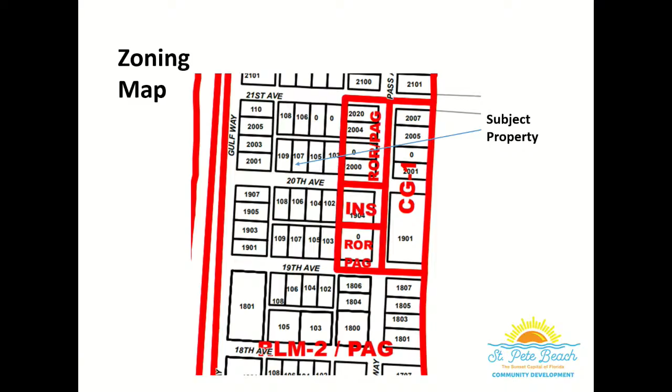An aerial of the property, it's on the north side of 20th Avenue. It has a zoning of RLM2, that's residential low medium on the future land use map. This property zoning district does allow for multifamily, but at the lot size, it allows for a single family home, which the applicant is requesting to build.

This property is within the Pass-a-Grille overlay. It does have standard 20-foot front and rear setbacks based on the underlying zoning district. The applicant did choose to go through the design review process, which makes them eligible for the house medium building type, which does have reduced setbacks. The trade-off is that it does go through the design review, which they went through earlier this month with the Historic Preservation Board.

The required rear setback for the house medium building type is 15 feet. They do have an existing setback that encroaches beyond that. They did receive a certificate of appropriateness for the prior historic home back in 2015 to add on to the rear of the structure, which made them eligible for a setback of up to 10 feet. They chose to build at 12.3 feet. That's not a variance, that is a benefit that comes along with historic structures when a certificate of appropriateness is issued, so they were able to take advantage of that at that time.

The home has been demolished. They are proposing a new home with a setback on the east side of 8 feet, which I'll show in a moment.

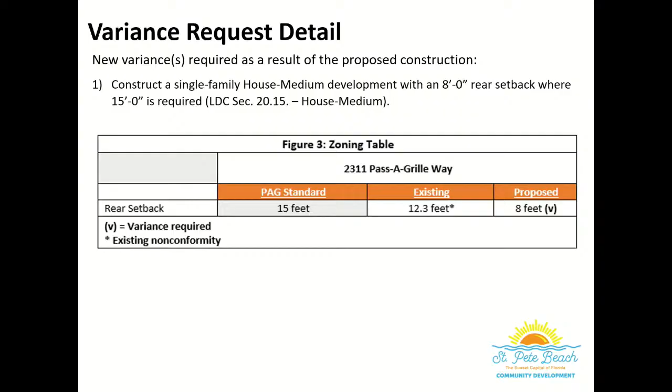The applicant had initially applied for a variance to the front setback requirement. They are choosing to build a structure with a 10-foot front setback that is a by-right permission based on the design review, which, as I mentioned before, they went through earlier this month.

They are requesting a rear setback reduction that goes beyond what the historic board can grant through that design review. As I mentioned before, that is a 15-foot rear setback. They are requesting a rear setback of 8 feet, so an encroachment of 7 feet. They had gone through that certificate of appropriateness process back in 2015, but that is a benefit that only extends to historic homes. It's not transferable for a new build. They do have to comply with the Land Development Code standard for the new build.

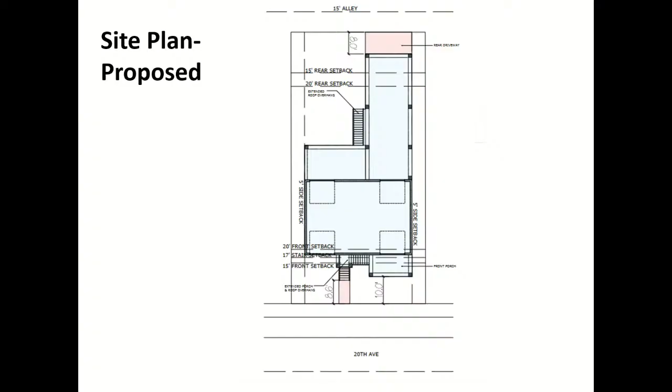The property was purchased in 2012. The setbacks at the time were stricter than they are currently. In 2017, the city amended its code to create these building types. So the rear setback has been reduced from an underlying zoning district standard of 20 feet to what is now allowed to be 15 feet based on the building type. As I mentioned before, the front setback standard has been reduced from 20 to 10 feet, which eliminated the need for a variance because the applicant chose to go through the design review. And I'll cover the second point in a moment.

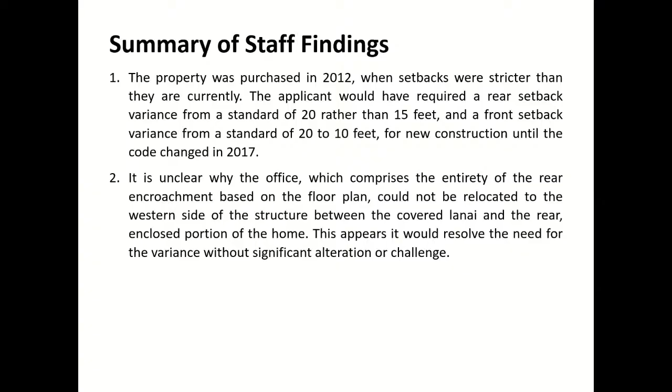Staff does find that the applicant has partially justified the request. The direct result of this variance is unlikely to cause any kind of adverse change in the neighborhood. I pointed out those 2 neighbor homes in the photographs. Those have 2-story portions of the residence that do encroach closer to the alleyway than the applicant is proposing to build the home. There are 2 stories. They are of similar scale and mass to the subject home. And actually, the subject home, I believe, is of a lesser living square footage than those homes would be. So the structure is certainly not out of character.

It did go through the design review process. There were a few minor design-related items that the Historic Board had recommended, particularly related to the garage doors in the front. The applicant has taken those under consideration, but both staff and the board had limited comments on the mass and scale of the structure. I do find it to be in character with the design standards as well as with the neighboring properties.

However, staff does request additional testimony from the applicant as to why the 7-foot portion of the building that is proposed to encroach could not be accommodated elsewhere without difficulty. Staff had pointed out next to the new outdoor deck on the west side of the structure, or possibly oriented north to south with the deck made a wraparound, would appear to eliminate the need for this variance.

Understanding that the applicant is seeking to comply with the same footprint, that is a benefit that comes along with contributing structures and preservation of historic structures. The applicant was not able to save the structure. I know that they looked into doing that, but that is a power that the Historic Preservation Board maintains as part of their certificate of appropriateness review powers, and we would just like to make sure that there is a genuine difficulty in this case with accommodating the office elsewhere on the site. The applicant should provide this testimony as well as whether any alternative plans have been developed should the variance not be granted.

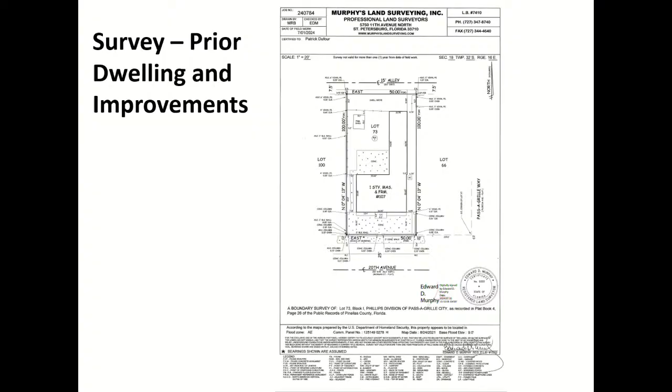Not the property we're discussing, but the neighboring property. Those pictures that Brandon referenced are also either contributing structures, and there is a single-family residence in front, and then they have the accessory structure to the back. So it's not one structure.

Okay, so I just wanted to clarify, there's a lot of setbacks talked about through this presentation. Number one, you said there is already an approved reduced setback for the front of the house by 10 feet, right? Correct. So the 20.15 building type standards allow for that 10 feet in the front based on design review, which they have gone through, so they're eligible for that without a variance. So they've taken advantage of that first 10 feet off the front, and now off the back there was a reduction from 20 to 15 that took place, and now they're looking for a reduction from that 15 down to 8.

So the former home was approved, that was a historic structure, and it was approved back in 2015 for a rear addition, which the historic board, without granting a variance, is eligible to approve to 10 feet. They took advantage of that, to 12.3 feet. So that was on the former structure, but unlike a variance, it's not transferable because that's specific to the historic structure. The historic structure is demolished.

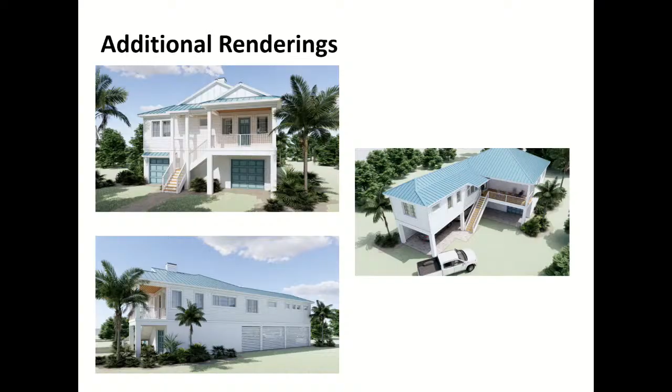There's an alley there, isn't there? There is an alley in the rear. How do you get to the alley in the rear? I'll show you on the site plans. I think there's an alley just to the east of the property as well. No, it would be to the west. The way the property sits, it would be one to the west. There is the alley that runs from 20th to 21st. So the property's here, there's another adjacent property, alley going north-south, and then east-west behind the property.

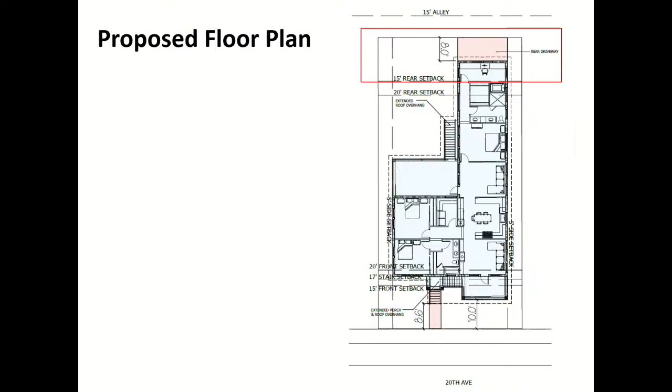Maybe show the aerial, Brandon, the aerial. Does that help orient you?

There are two alleys, as there are any place in Pass-a-Grille. There's one on the east and one on the west. Not by that property necessarily, but there are two different alleys. It is an interior lot, correct, but is there alley access that the property does currently utilize, or prior to demolition for rear access? That alleyway running east to west is heavily used by a lot of those properties in there.

Brandon, for the original historical designation that allowed them the 10-foot setback in the rear that they took advantage of, the 12.5 is no longer relevant because they had to demolish the structure, is that correct? They are only now eligible for the front? Correct. It's not like a variance that typically runs with the land, it's specific to the contributing historic structure. So that's been demolished, and they would need to go back, even if they were to go to 15 feet based on the underlying, they would need to get a variance for that.

So what's shown is a request relative to the building type standard. Any additional questions for Brandon at this time? So all buildings in this area are subject to a 15-foot rear setback. Correct, yes. And then they're subject to a 20-foot setback, with the exception that if they go through this design review they can be authorized to do a 10-foot setback. Correct, so the option is based on the underlying zoning. So if they were to not go through design review, the setbacks would be 5 on each side, 20 feet in the front and in the rear.

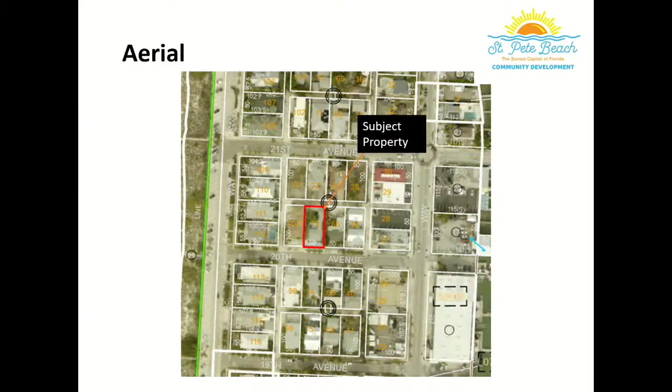If you can just state your name and address for the record, please. Mark Strojeski, 705 126th Avenue, Treasure Island, Florida. I'm with Strobel Design Build. I'm the contractor and partial designer for this project for our owners here.

I want to first address the question you had regarding the garage doors in the front, because we kind of talked about this through the design, and I can let the owners testify a little bit to this as well. It's so they can open it up and have use of that front, and coming from the beach down the street, they tend to come through the front there rather than the alley. So that's the design feature.

What you don't see on the drawings and renderings is that those garage doors will actually have islands of vegetation in front of them, so they're really not going to be exposed from the street that much. There's going to be planter beds there and trees in the front. And also, as a requirement, around the front edge of the property there will be a garden wall, around the whole front, with just the opening for the path coming to the house.

So it should be very clear to everybody that those garage doors are not for traffic to drive in. There's no curb cuts or anything like that from the street.

Helpful. So then what I'd like to also address is that this project is not really something that the clients wanted to do. They kind of have to because of the floods. I was the one that actually put that addition on with that first variance in 2015 with them, and they're in love with their home. They had it before they had the kids, so we added that bedroom on the back, and they love the floor plan, and they've lived with that, and they're actually going to be making this their permanent home here, coming from Tampa. Then the storm hit, and we had to do something.

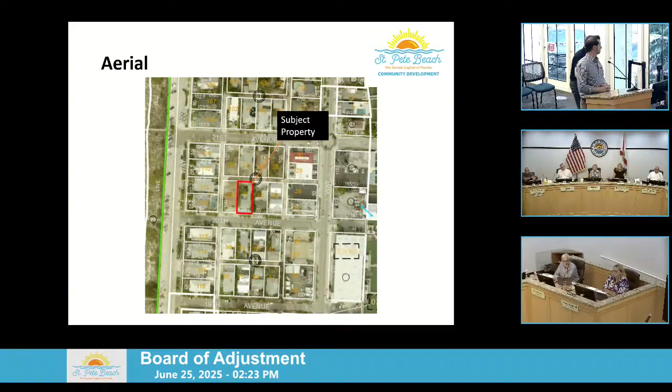Second-story porch, okay. And then what about the house on the other side? In the upper left picture, you go up the front steps and turn right, and that's an 8-foot by 12-foot or so open porch leading to the front door. That front porch sits in front of the mass of the home. In the bottom left, you can see it in side profile as well, where the porch will be a little closer to the street than the front of the house to the east.

And what about the house to the west? I don't think there is a house to the west. I don't know, I'd have to look. They're all about the same.

Looking at this view, can you point out, were you to explore without this variance, what your direction would be? Without the variance, we'd probably have to eliminate the office, and at that point I'd talk with the homeowners about adding a second story if they need the office. What we're trying to do is not build a mega mansion, but keep what was a one-story home just a little higher up. Without a variance we could add another story and get the square footage, but it's expensive rebuilding a new home. They loved how it functioned before, so they're not trying to maximize square footage, just the layout.